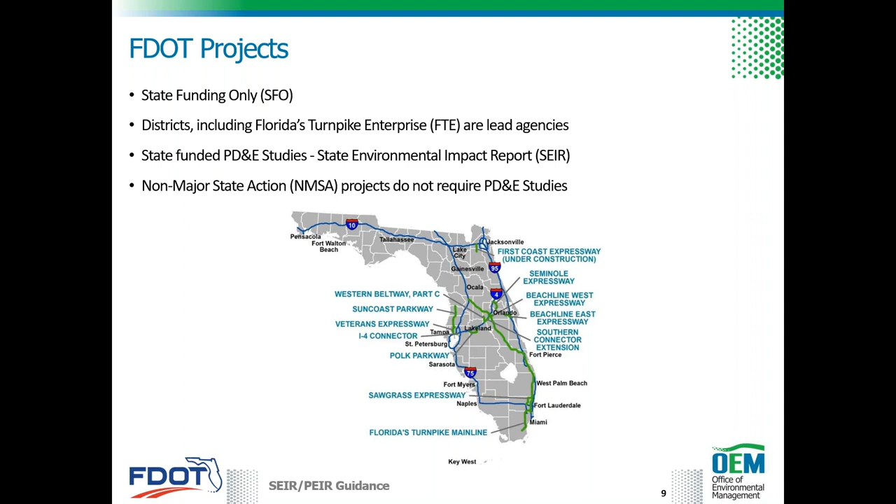FDOT uses the Efficient Transportation Decision-Making, or ETDM process, to provide early identification of potential environmental considerations and transportation planning to streamline project delivery. Typically, the ETDM coordinators provide a list of projects which should complete a screening, generally as a result of the

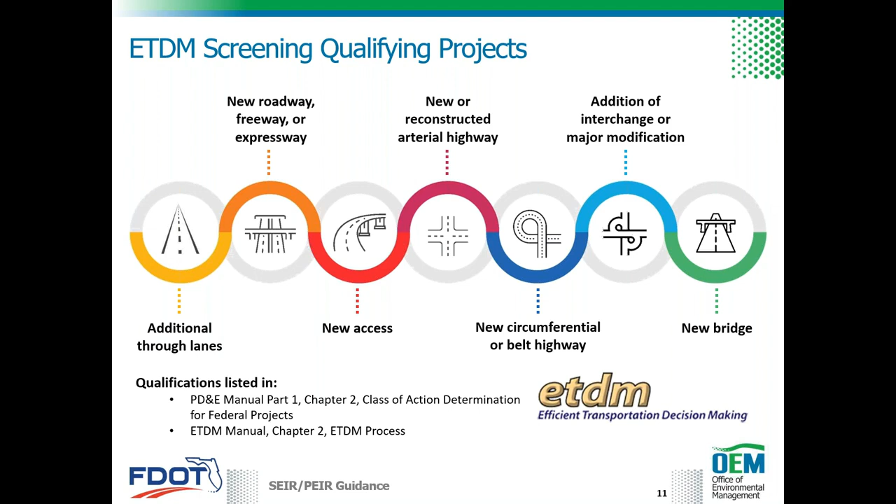SWAP process. And projects that qualify for the ETDM screening include those that propose additional through lanes, such as capacity improvement projects, new roadways, reconstructed arterial highways, the addition of interchange or major interchange modifications to a freeway or expressway, and new bridges. And this list of qualifying projects is provided in Part 1, Chapter 2 of the PD&E manual, as well as in the ETDM manual.

During the planning screen, comments received from the Environmental Technical Advisory Team, or ETAT members, and the public help FDOT and the Metropolitan Planning Organizations, or MPOs, and Transportation Planning Organizations to identify environmental considerations that assist in assessing projects for inclusion or advancement in that long-range transportation plan and further into the cost feasible plan.

Now, during the programming screen, the qualifying projects are reviewed when being considered for funding in FDOT's 5-year work program, or MPO Transportation Improvement Program, or if they're already funded before advancing to the PD&E phase. Now, during the programming screen, those qualifying projects that we had just gone over undergo ETAT review and coordination, and also advance notification may be initiated.

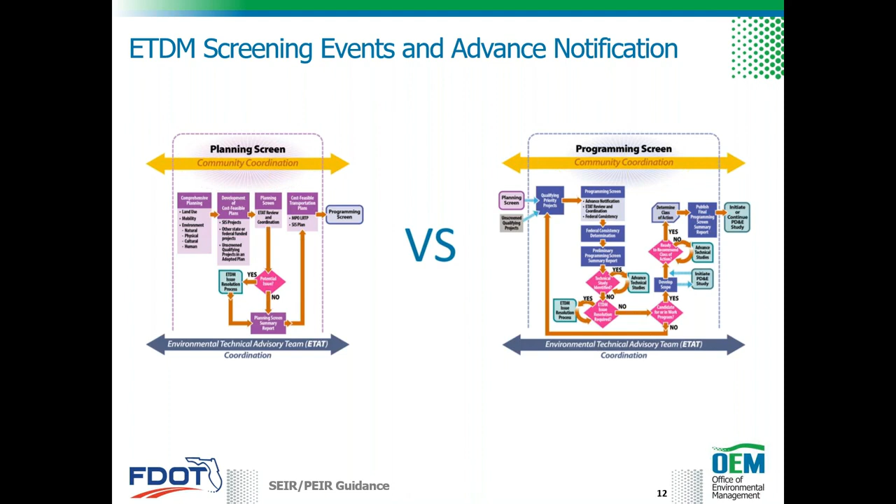I'm going to go ahead and hand this over to Mike to send out our second poll question.

All right. True or false, environmental evaluations are required for all FDOT-led projects to comply with state and federal laws and FDOT policy.

Give everybody about 10 more seconds to get your answers in. All right, I'm gonna close it.

So it looks like most of you said true, 84%. That is correct. So I am going to go ahead and give it back to Christine.

In lesson 2, we're going to briefly discuss those non-major state actions. As I mentioned earlier, the non-major state actions are those FDOT-led projects that don't qualify for the ETDM process, and therefore they do not require a PD&E study. Projects that are perceived as non-major state actions are typically identified during the SWEPT planning meeting.

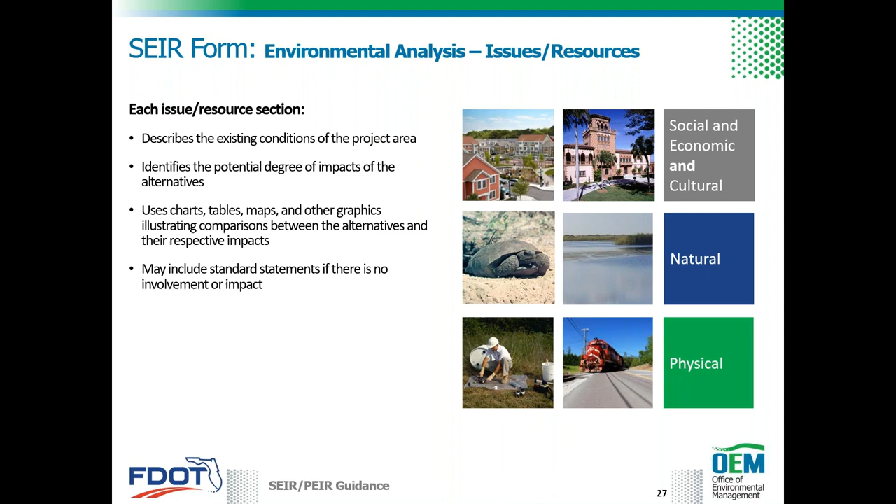Each issue or resource in the environmental analysis section should describe the existing conditions, the potential degree of impacts, comparisons between alternatives, and may include some standard statements that are generated in the SWEPT form. Basically, it should summarize the analysis that was conducted on the specific resource. The environmental analysis itself is completed using that guidance, as I mentioned before, in Part 2 of the PD&E manual. Part 2 includes separate chapters covering the social and economic, the cultural, natural, and physical environmental resources shown here.

Now, these chapters provide guidance on how to conduct the environmental and engineering analysis, how to assess project impacts, consult with resource agencies, and also how to complete the specific technical reports. Some issues are evaluated differently when there is no federal involvement, and most of the chapters covering the environmental resources will have a corresponding training, and links to these along with the manual chapters can be found on the PD&E manual website.

In the SWEPT-based SEIR form, there is a page for each of the environmental resources divided up by sub-resource. So for the social and economic section, you will see subsections for each of these listed here. The form will allow you to check whether any of the resources here are enhanced or whether they will have a substantial impact or not.

A brief summary is provided for each resource. Commitments can be added, and technical materials and attachments can be uploaded. Each of the resources discussed in the following slides can be documented in the SEIR form in that same manner.

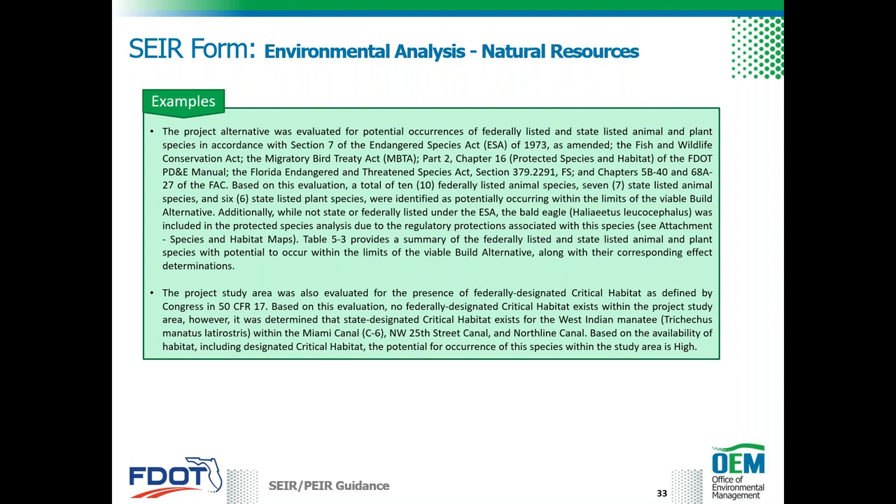Here we have an example of information included in the Protected Species and Habitat subsection, stating that the project was evaluated for potential occurrences of federally listed and state listed animal and plant species. It also includes the result of the evaluation and references a map and a table, and the determination that there were no federally designated critical habitat in the project study area.

The physical resources section includes subsections that are listed here, and the example provided here is in the highway traffic noise subsection.

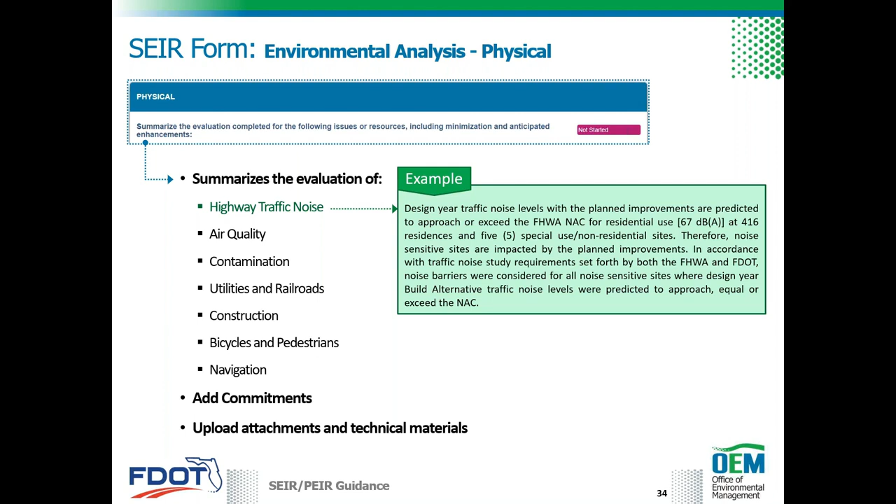The permit section allows selection of federal, state, and local permit types that will be needed for the project. These should have been identified through coordination with permit agencies and the permit coordinator during the environmental analysis. Information is also added on the status of the permits in question, and more information can be found in Part 1, Chapter 12 of the PD&E manual.

In the engineering section, the engineering technical documents are uploaded. This is typically the preliminary engineering report, which includes considerations concerning evaluation of existing conditions, selection of design parameters, alternatives evaluation, and selection of that preferred alternative. One thing to note here is that SEIRs do not require the evaluation of multiple alternatives.

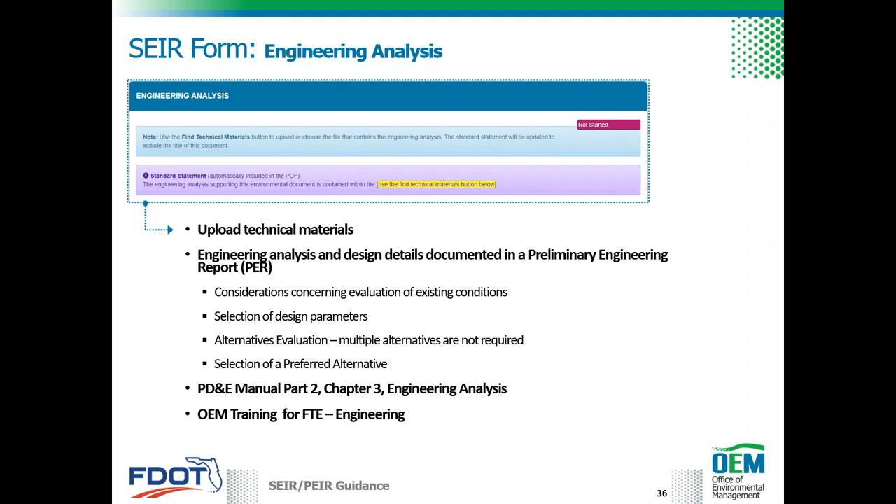More information on engineering analysis is found in Part 2, Chapter 3 of the PD&E manual, and also the OEM environmental training for Florida's Turnpike Enterprise. It does have a recording on engineering.

The commitments section of the form includes a summary of commitments previously identified when completing the individual sections of the form. Other commitments can also be uploaded here. Commitments are documented following FDOT's project commitment tracking procedure, and guidance on preparing commitments can be found in Part 2, Chapter 22 of the PD&E manual. There's also a computer-based NEPA introductory course covering commitments.

It's FDOT's policy to promote public involvement opportunities and information exchange activities in all functional areas, including various techniques adapted to local area condition and project requirements. Part 1, Chapter 11 of the PD&E manual provides guidance on how this is achieved during PD&E, and the public involvement process outlined in this chapter is followed when preparing a SEIR.

The public involvement section documents if a public hearing is required and the status of holding that public hearing. For a project that doesn't require a public hearing, then the opportunity for a public hearing may still be provided and documented.

Section 339.155 of the Florida statutes requires a public hearing for the following types of projects: for those that increase capacity through the addition of new lanes, if they provide new access to a limited or controlled access facility, such as a new interchange, or construction of a facility in a new location.

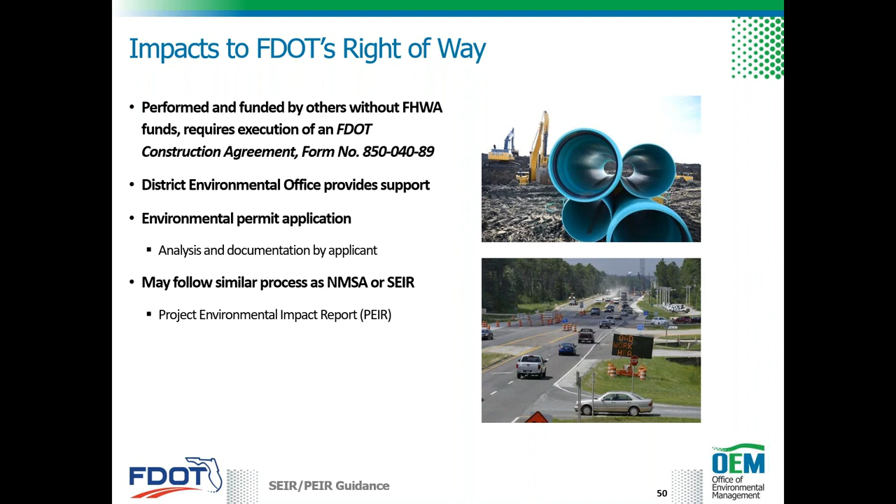Completion of environmental analysis and documentation by the applicant prior to the environmental permit application may follow the same process and format as a non-major state action or SEIR. However, the local agency or private entity should recognize that these document types are reserved for FDOT-funded projects. Instead, the supporting environmental documentation for local and privately funded projects constructed on FDOT right-of-way is necessary to acquire environmental permits and subsequently an FDOT construction agreement. These types of projects may end up being a preliminary environmental impact report, or PEIR.

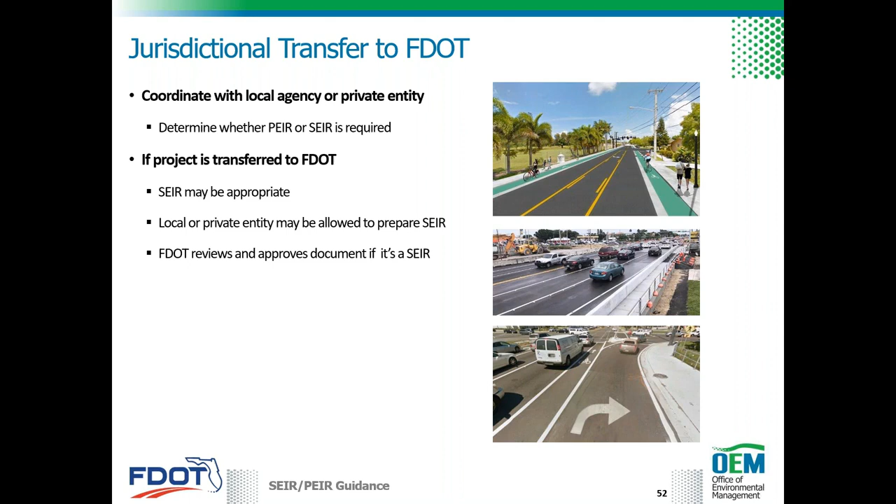In cases where a privately or locally funded project's jurisdiction is going to be transferred to FDOT later at any time during project development, the district should work with the local agency or the private entity to determine whether a PEIR or a SEIR should be prepared. If the project's to be transferred to DOT, then a SEIR is most likely the appropriate document. In such cases, FDOT may coordinate, review, and approve a document prepared by a local or private entity as a SEIR. The district should coordinate with the local agency or the private entity to determine the level of analysis to satisfy the documentation requirements.

A local agency may advance a project through any one of several state funding programs, such as the County Incentive Grant Program and the Transportation Regional Incentive Program. For these projects, if state funds are being used, the local agency may prepare a PEIR to support its acquisition of appropriate environmental permits and to satisfy other agreements with the FDOT. The local agency should follow the procedures outlined in Part 1, Chapter 10 of the PD&E manual.

There may be instances when a local agency seeks to advance a project with federal highway funds, in addition to state funds or local funds. In these cases, a federal environmental document or NEPA document would generally be prepared by that local agency with FDOT support and as deemed appropriate through early project coordination using the FDOT Local Agency Program, or LAP. For more information on LAP, you can see FDOT's Local Agency Program Manual, available on FDOT's Procedural Document Library website. A thorough understanding of funding sources, system designation, proposed work activity, and existing or proposed agreements, such as a joint participation agreement or a memorandum of agreement, assists in determining if the project should advance as a PEIR, SEIR, or federal environmental document.

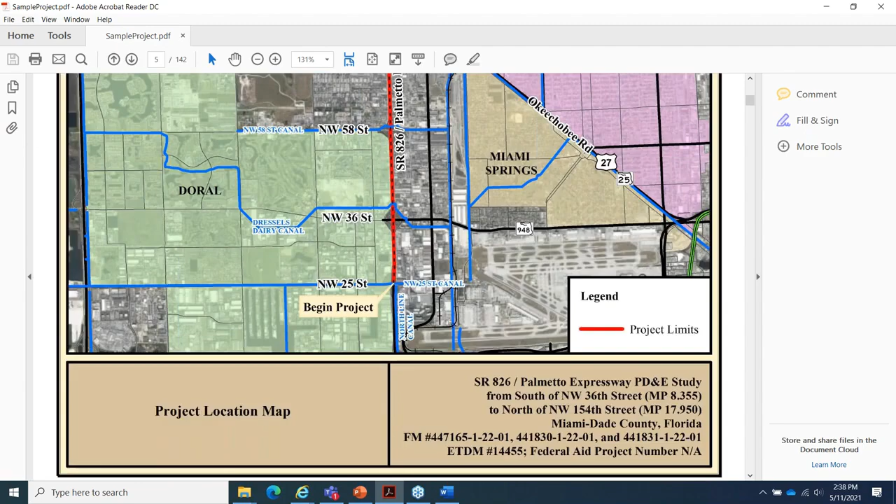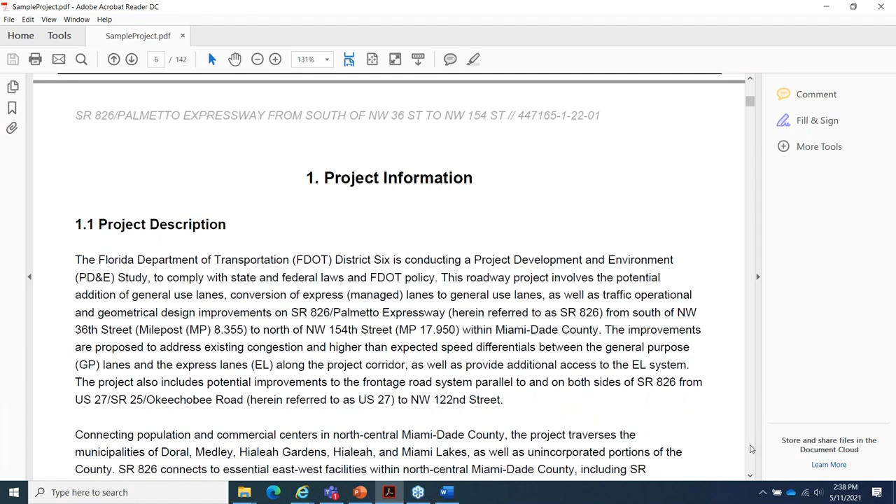So first here we have a project location map, and then the project information, including the project description section, subsection, purpose and need, and then planning consistency. If planning consistency was entered for the sample project, then it would show up here in the form of a table.

Okay, and here we have this environmental analysis summary. This again is something that is automatically generated depending on the items that were selected while the form was being prepared in SWEPT, and basically shows if there were environmental impacts or enhancements, or for some issues if there was no involvement. This covers all of those issue and resource topics.

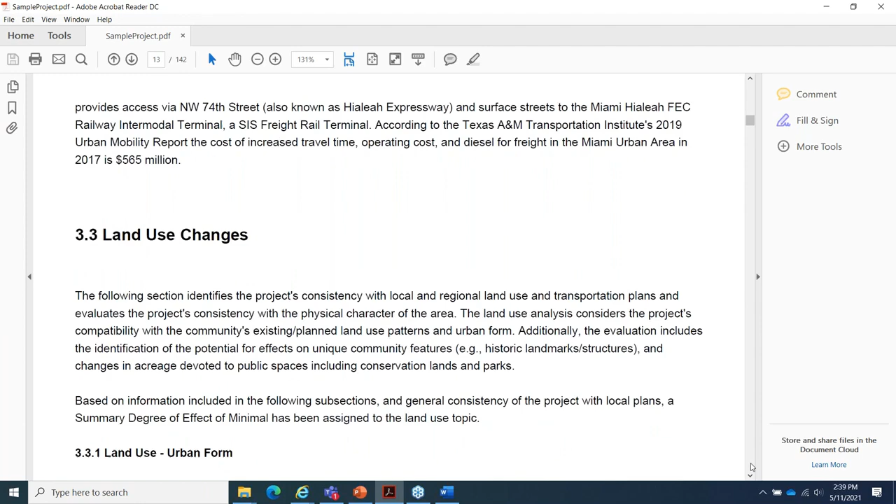So the next section is on social and economic, with the first subheading being social, then economic. Notice the use of a table - tables are very helpful in displaying information very clearly. Then there's information on land use changes, mobility, and aesthetic effects. We also have relocation potential under this heading.

The next section is cultural resources, with subsections on Section 106 of the National Historic Preservation Act, Section 6F of the Land and Water Conservation Fund Act, and also recreational areas and protected lands.

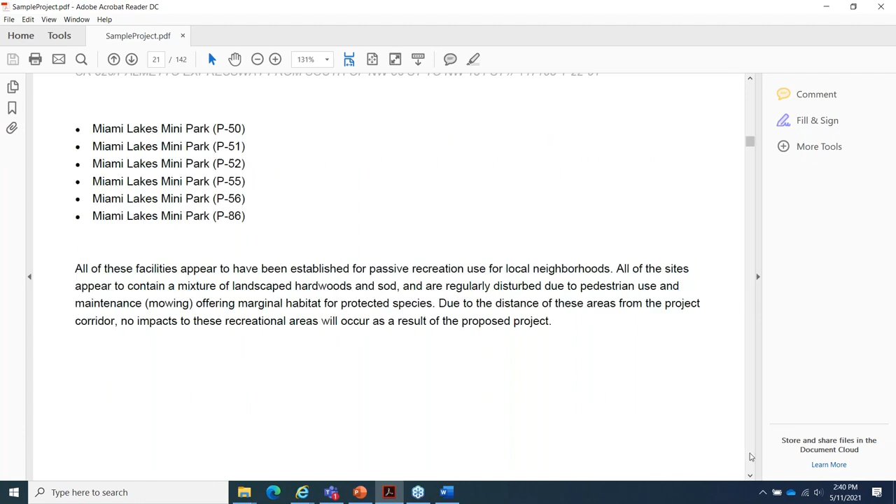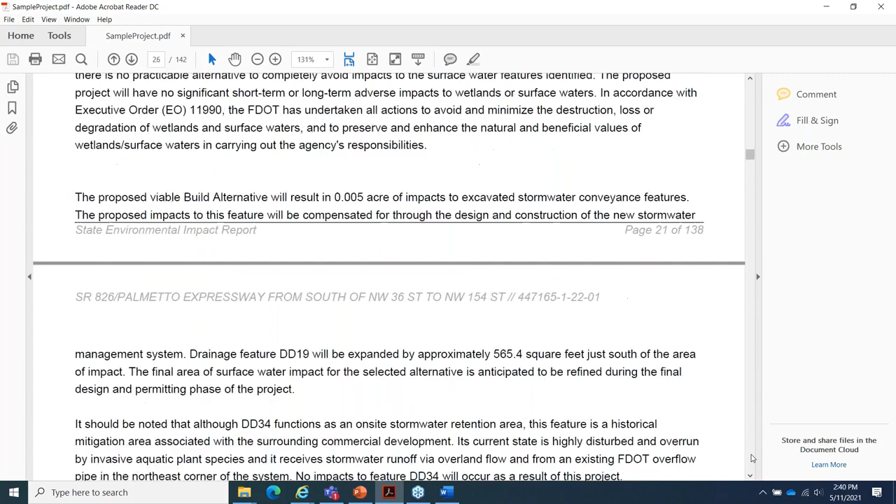The next section is on natural resources, with subsections on wetlands and other surface waters, aquatic preserves and outstanding Florida waters, water resources, wild and scenic rivers, floodplains, coastal barrier resources, protected species and habitat, and also essential fish habitat. Notice that for some of these sections, sometimes all that is needed is a simple statement that the resource is not in the project area. I believe this is a standard statement that automatically comes up if no involvement is selected.

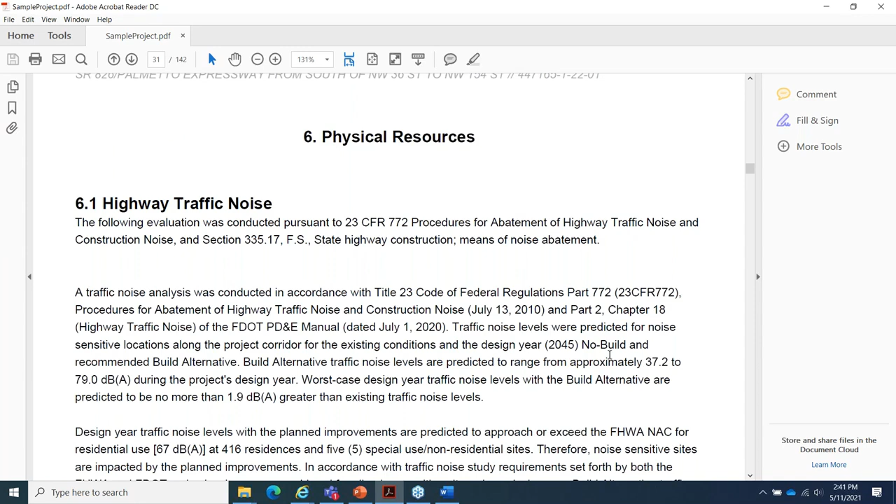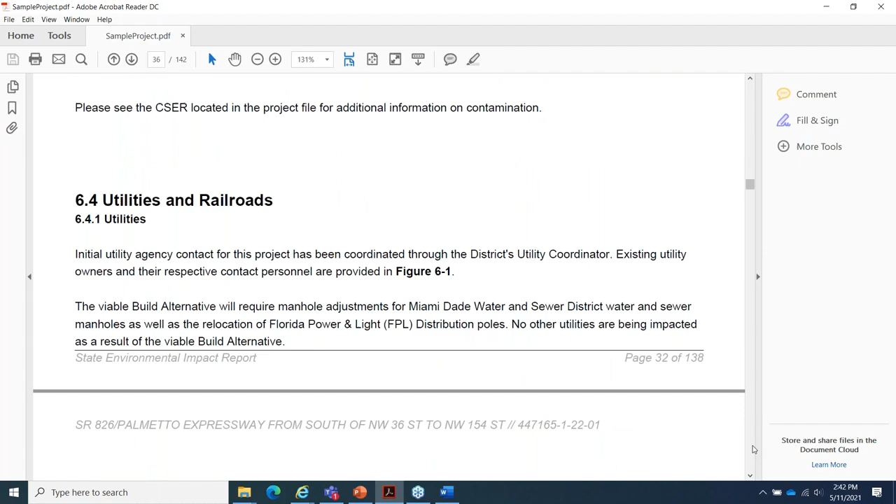The next section is physical resources, with subsections on highway traffic noise, air quality, contamination, utilities and railroads, construction, bicycles and pedestrians, and also navigation.

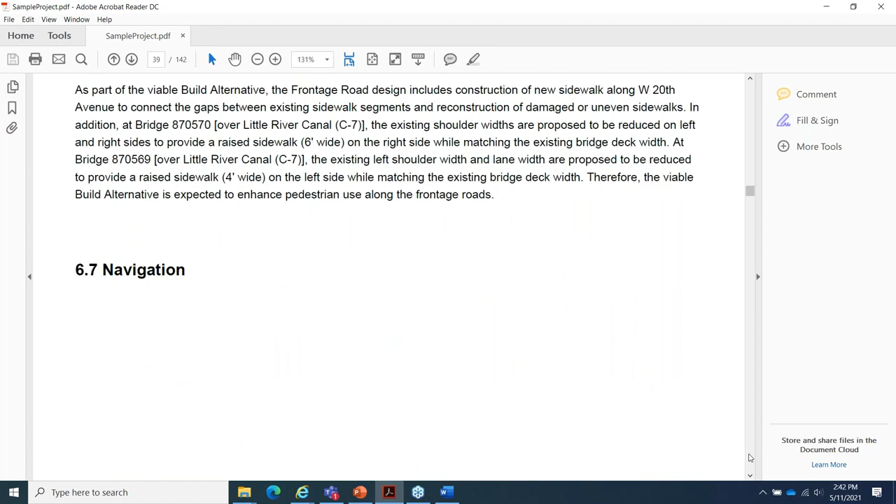The next section is permits, and this is a list of the environmental permits that were anticipated for this sample project. It's got them listed here, and then it also has their status. For this sample, they have yet to be acquired.

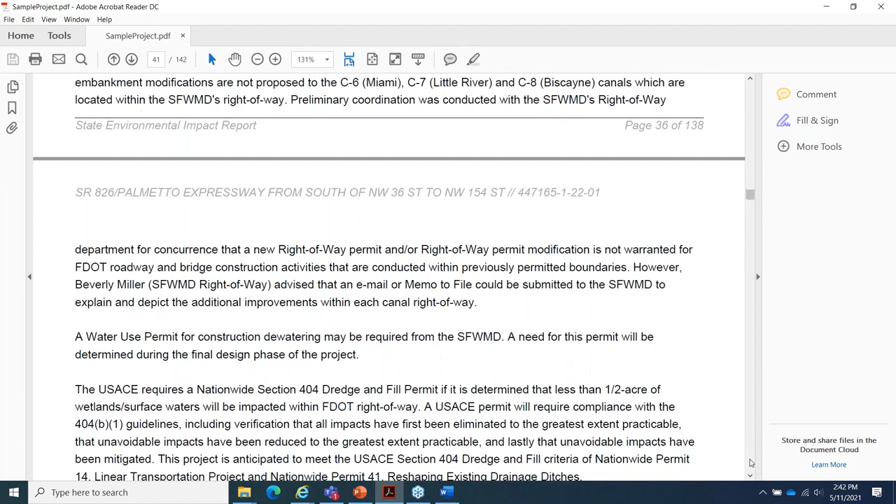Then we have the engineering and analysis support section. Basically, it just states the document that includes the engineering analysis. For this particular project, it was selected as the preliminary engineering report, and the preliminary engineering report is included in the project file.

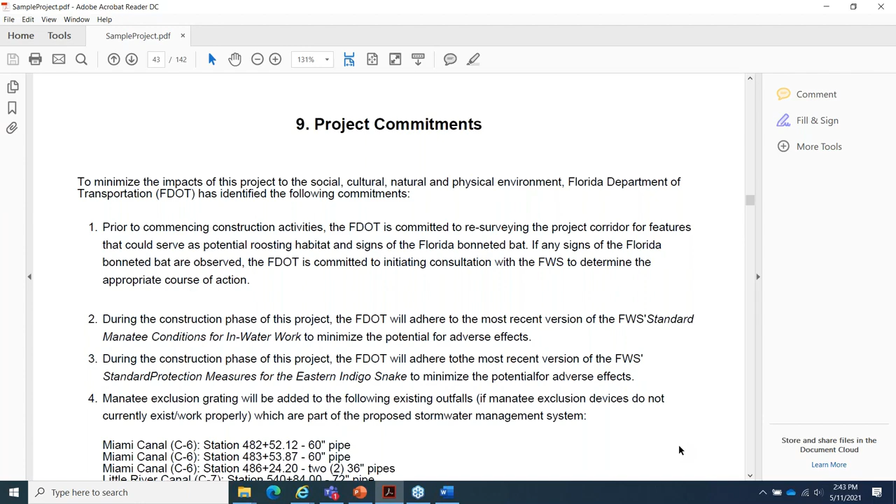The next section is project commitments. Notice this lists all those commitments that were entered as the form was being populated in SWEPT. Also notice that it numbers them, which is very helpful. And if the project needed to be approved for public availability, then here's where that signature would show up on the SEIR.

This next section, public involvement, includes a summary of the public involvement activities. It's got a summary of activities other than the public hearing, and I believe here it has the public hearing date.

The next section is the list of technical materials. Remember, these are the technical materials that were prepared; they're not actually part of the report itself, but they're in the project file. Notice we've got the preliminary engineering report in here and the comment and coordination summary report, which were both referenced earlier in the text on this sample project.

Then we have a list of attachments, and note these are divided up by topics, each of the different topics that had their own page for filling out in the SWEPT form. All the attachments are put under the subheading of where they were attached.

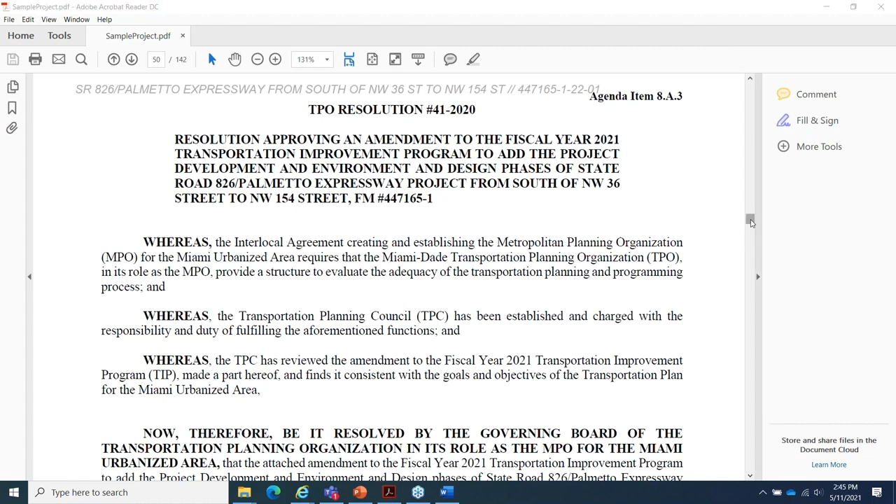And so we'll go into the appendix. Sorry about that. Okay, the first appendix we have for this sample project is a planning consistency appendix, which includes the planning consistency information. Then we have the social and economic part, which has a couple of land use maps.

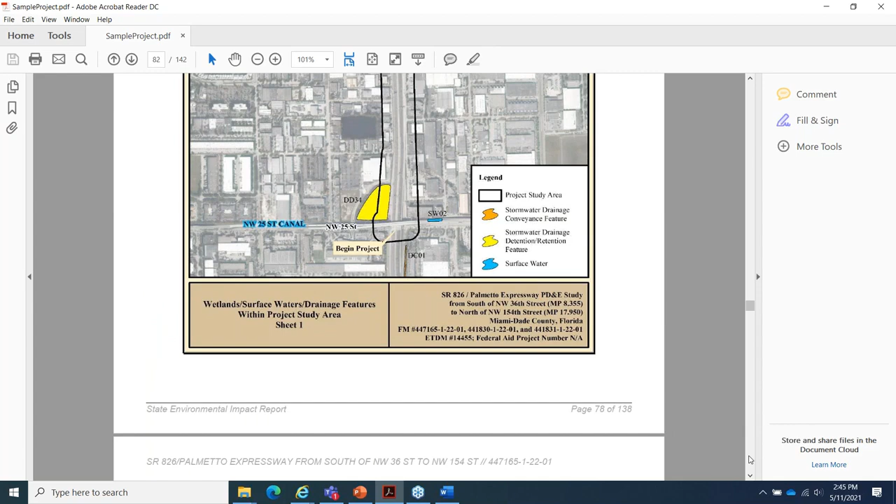The cultural resources appendix, which I believe is the SHPO concurrence letter for this particular project. I think it's got the concurrence signed here. And the natural resources appendix. This particular one has wetland maps. It has species maps.

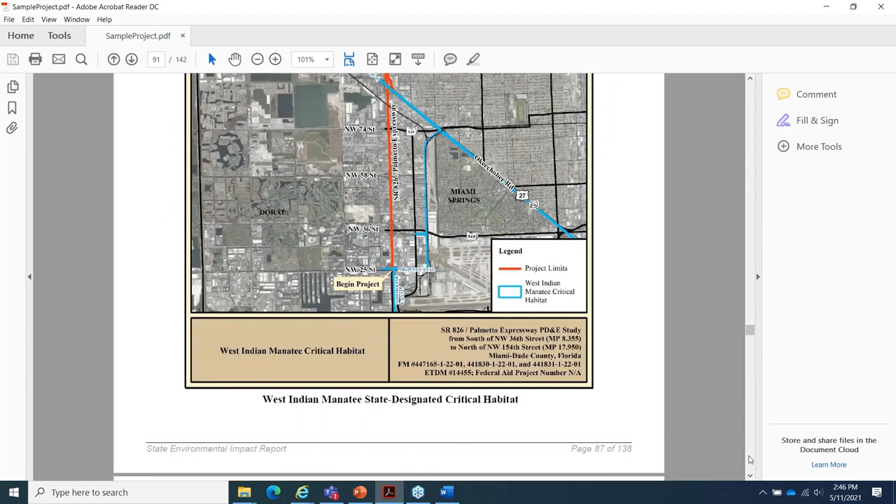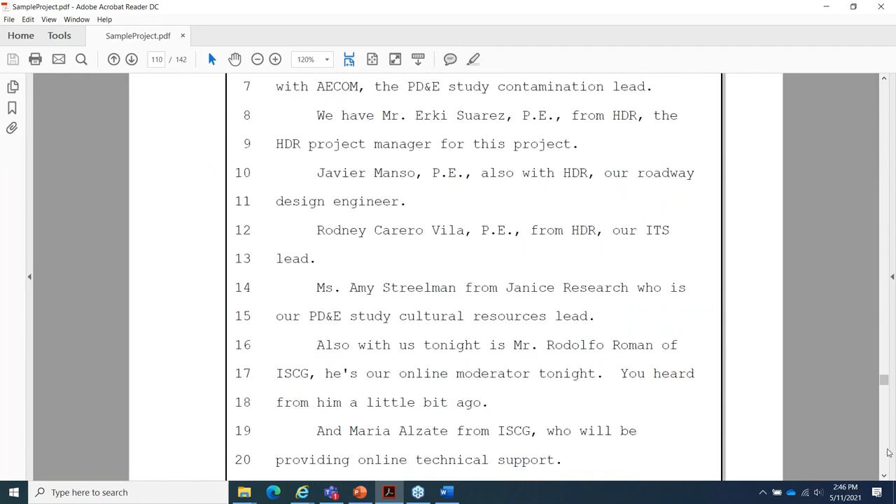And then the physical resources appendix, where this one has contamination maps, so this shows potential contaminated sites. And then the public involvement section. Let me scroll back up here. This is the public involvement appendix. It's going to have your public hearing transcript and also the public hearing certification at the end.

So I think that wraps it up for our run through. I apologize again that we had to do this at the end. Let's go back and see if we have any questions for the question session.

Christine, we did have one question: what's the logic behind planning consistency not being required for SEIRs? I think the response is that planning consistency information, to the extent it is available, helps to inform the various parties involved in the process, including the public pursuant to 339.155. However, it is not required. Hopefully that answers your question, Kenneth.